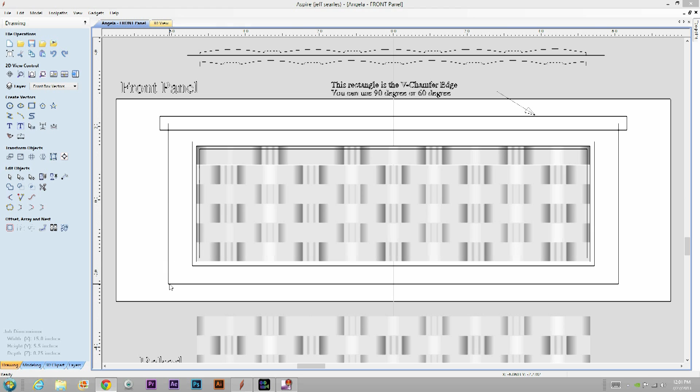So I thought, how can I do that? He's given us all of the dimensions, all of the vectors for the final profile cutout shapes. So what designs could I put in here in place of these basket weaves that would make it my own? I came in here and deleted the basket weaves that Michael had in place.

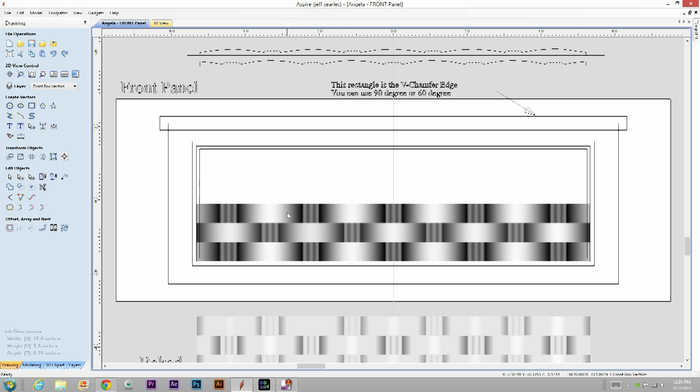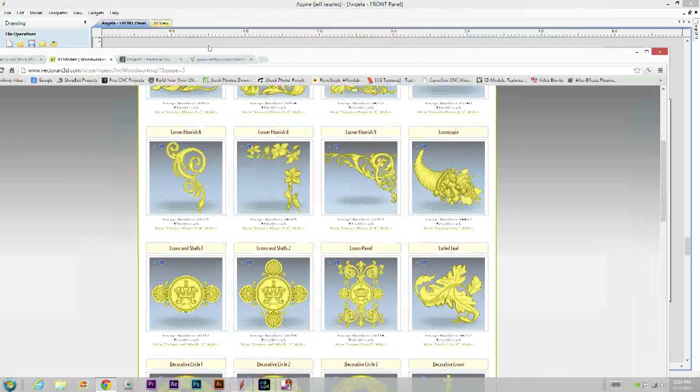I understand that Vectric makes it really easy to import vector drawings, line art if you will. You can go to their website, to the Vector Art 3D website. For example, if I wanted to put this image in but V-carve it instead of doing it as a 3D, I can click on this and get a free EPS outline that I can download to my computer, save it to my desktop, and then simply import that vector drawing I just pulled from the Vector Art 3D website. Here it is.

I could, if I wanted, just V-carve that right into the center. But I thought, let's really put myself and the software to the test. So I belong to a place called Dreamstime that allows me to get stock photos and things. I went online and look at all these vector images you can get. Vectric makes it so easy to import those into the software and V-carve them, so it comes out and makes just a beautiful panel.

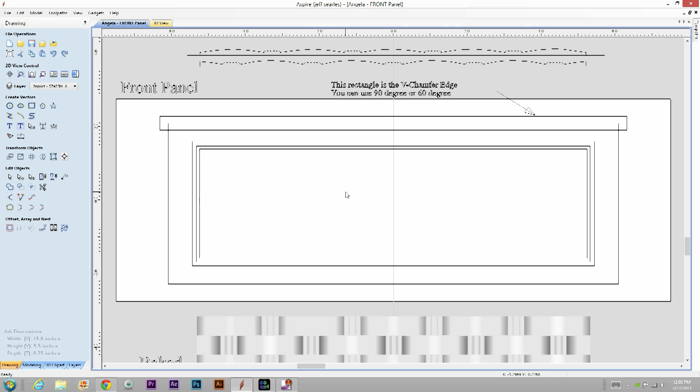So that's what I did, I came in here and downloaded that and got a couple of photos. I called it the scrolls. I went File, Import, and wanted to import the bitmap because it's coming in as a JPEG. So I imported scroll number two. Boom, and once again they make it so easy. You come up here and go File, or excuse me, Edit, Trace Bitmap.

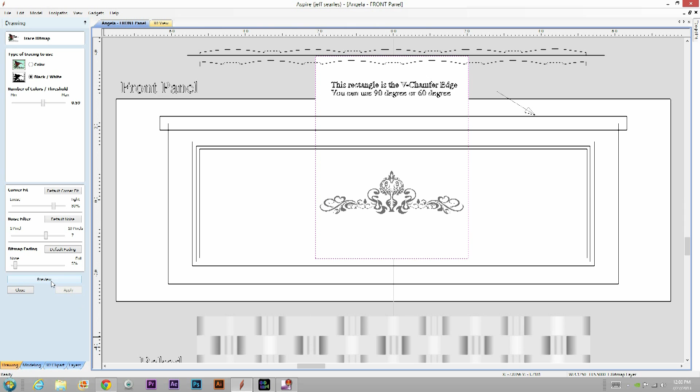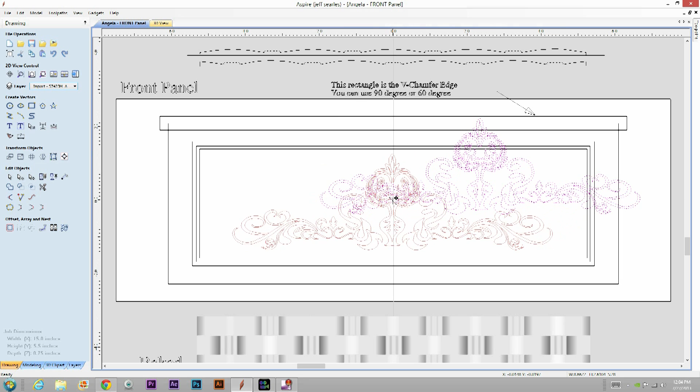You play with the sliders here to get the best resolution, then preview, apply, and close. If you turn off the bitmap layer, you're left with a really nice image of vectors that you can resize to fit the project panel. That's exactly what I did, resized it and put it right in the middle.

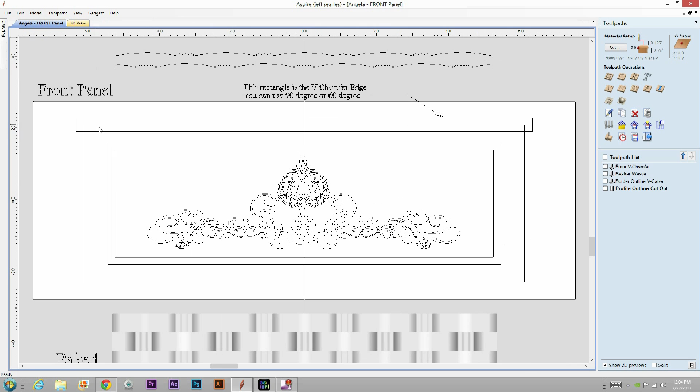I'm not robbing Michael completely blind. I'm certainly using his foundation as it relates to the profile cutouts and these other borders that go around the design that I imported.

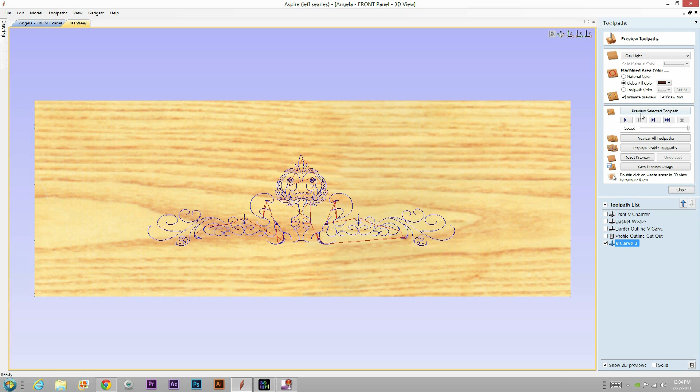So then we come over here, select our vectors, and go V-carve. Follow all of the parameters and use the bit that you want. I used a 60-degree bit, and you hit calculate. Now you've got a V-carve toolpath, and if I preview the selected toolpath, that's how it's going to cut right into the wood.

So I went online, found an image that I liked. Vectric made it so easy to import that image, create a toolpath, and I was able to do this on the panels for my box.

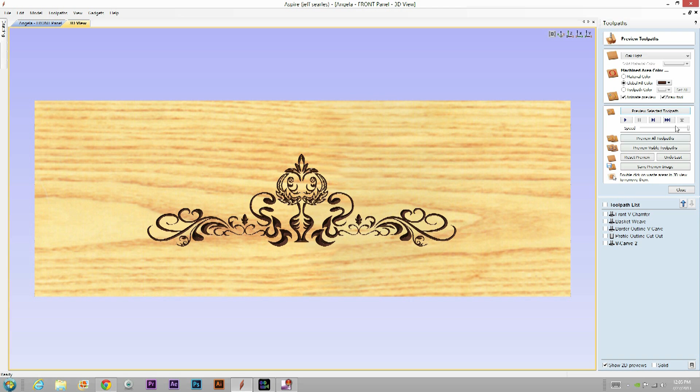Let's go ahead and preview all of the toolpaths, including the one that Michael did. Oh, sorry, let me stop that and reset the preview. Because we're not using Michael's basket weave, we need to come in here and delete that.

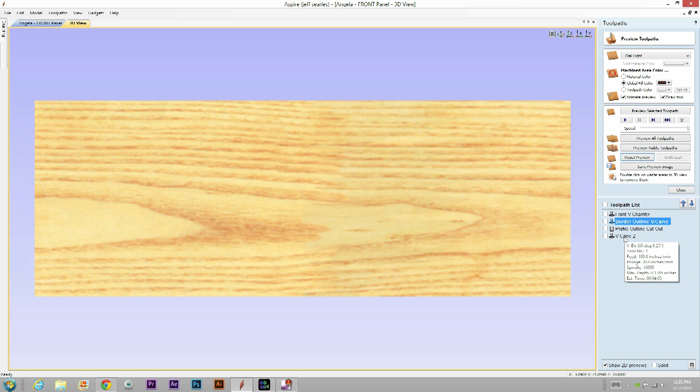Okay, so we've got his outline, the V-chamfer, the profile cutout, and then my V-carve that I added myself. Let's go up to toolpaths, recalculate them all, and now let's preview them all. And there you go, you end up with a really beautiful front panel.

I followed this on all of the panels that I did, kind of made them my own. Coming up next, I'm going to show you how we cut these out, put it all together, and came up with the Paradise box.

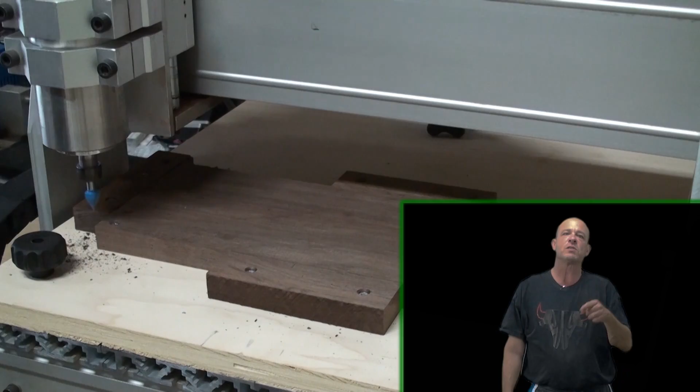Hi everybody, it's me. Over the course of these next few videos, I'm just showing you how we cut out the front panel in its entirety. I sped the video up, and then the very last video is the top.

The top is everything there on the top except the actual cutout. I did not get the profile cutout on there, but it was a toolpath that, once we got the name in the middle of the box and the design work, cut out a V groove all the way around the top, and then ultimately the profile cutout that cut out the whole top.

As you'll see at the end of the video in the finished box, the top fits right on very nicely. Put a couple of hinges and you're good to go.